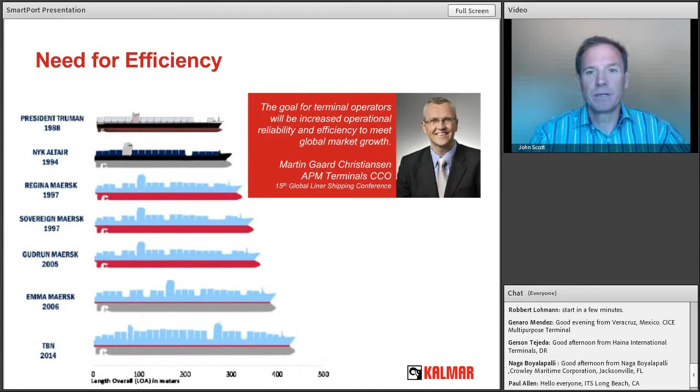And the expectation is that that vessel is turned quickly. There's no value to the owner while it sits there at the terminal. So this creates even greater strain on the terminal operator to put more equipment into service, to put more people in the terminal, and create safety issues, and it also decreases the efficiency of the operation.

The second thing to think about is the competitive landscape. If we look at the 20-year period leading up to 2010, there were 9 automated terminals that were deployed in that period. If we look now at the last 3 years, there are 12 automated terminals that are either deployed or in the process of deploying. In the Americas, you have Global Container Terminal in New Jersey, and right in the LA Basin, you have TraPac and LBCT. So the competitive landscape is changing, and it will be significantly more competitive.

And so for the terminals that are not fully automated, which is the bulk of those terminals, process automation is the means by which you can gain the reliability and the efficiency that you need in order to compete with the fully automated terminals.

When we talked at the last webinar, we talked about the difficulty of seeing process automation. You look out the window, you see cranes, you see equipment, you don't see process automation. And the same can be said of our own organization.

So I've put this slide together to emphasize where the Kalmar SmartPort solution fits into the big picture.

Most everyone's familiar with Navis and the terminal operating systems SPARCS and N4. Bromma is certainly very well known. Spreaders are deployed on most lifting equipment. And then within the automated equipment space, the automated stacking cranes, the AutoStrads, the auto shuttles, Kalmar's brand is well known.

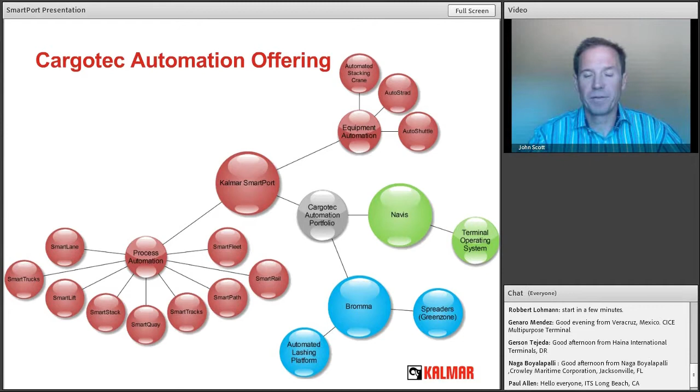So less well known has been the process automation, and over the last few years, Kalmar has pulled together offerings that were provided in-house, offerings that came from Navis, and offerings that came from a company called WhereNet. All of these offerings now are united under the Kalmar SmartPort brand, and we'll be talking about 5 of those 9 different modules as we go through the presentation today.

The technology comes not only from the internal Kalmar brands, Navis, Bromma, but also from third-party vendors that are part of our SmartPort Alliance. We've partnered with APS that provides the OCR technology we'll be talking about today, with Simeo that provides the tracking technology for GPS and LPR, and with Zebra that provides the RTLS tracking and RFID technology. Another vendor, Cross Control, is able to provide screens and integrated work instruction through SmartPort.

As we go through the presentation today, this is a really important point. If I look at the early projects I was involved with at APL, APMT, SSA, each of those terminal operators had to do all of their own research, put together a collection of vendors, put together the integration. It was a lot of work.

What the Kalmar SmartPort Alliance offers is the ability now for a new customer, like for example APMT Elizabeth in New Jersey, to have a single point of contact, Kalmar, to deploy the entire system we're going to talk about today. So single point of contact, known integration, and a project that is able to run much more quickly and smoothly than prior to the SmartPort Alliance.

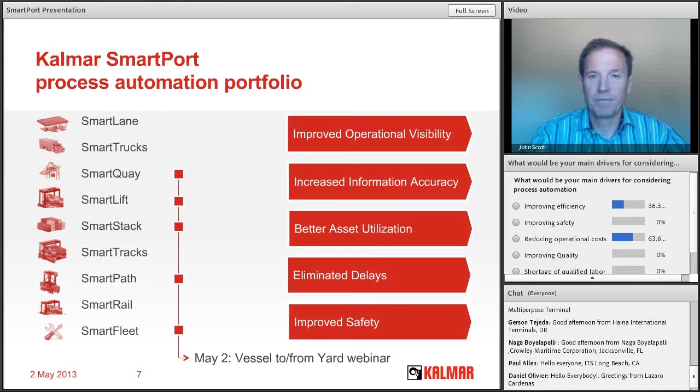So today's focus, we're going to look first at SmartQuay. We'll talk a little bit about SmartLift and SmartStack, and we'll spend some time with the SmartPath application and the SmartFleet application. These are 5 of the 9 modules that are part of the Kalmar SmartPort suite.

So first, what I'd like to do is talk a little bit about the process as it exists today, the manual process as it exists today, versus the process after the technology we'll talk about today has been deployed. Let's start at the vessel. At the vessel, for most terminals that are manual, two things need to happen.

First, the container being removed from the vessel needs to be identified, and that information needs to be confirmed into the terminal operating system. Second, the equipment that container is delivered to needs to receive a work instruction. Whether it's a terminal tractor or a strad, it needs an instruction on where the terminal operating system has determined is the most efficient place for that container to go in the terminal.

So, in a truly manual environment, that might be a list of containers printed out in advance, and radio instructions to the terminal tractor or the strad.

For terminals that have a little bit more sophistication in their terminal operating system, they may use a software module like Hatch Clerk, having a person manually type in the container ID and the terminal tractor ID, and then the terminal operating system can calculate and dispatch the work instruction to a screen in the truck. A little bit better than paper and radio, but still a process completely reliant upon the person entering the container ID and the terminal tractor ID. The speed at which they make that data entry is the speed at which your operation will proceed.

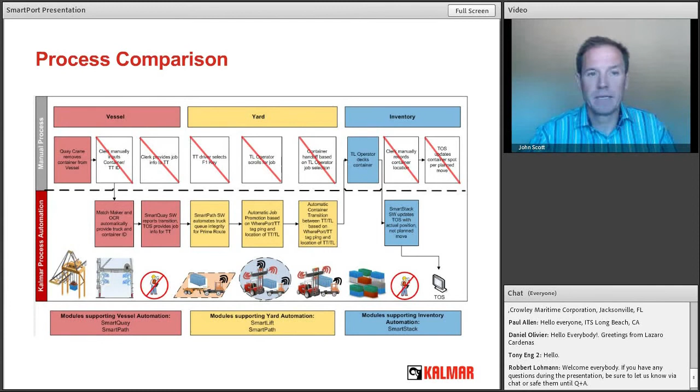Just to summarize, across the top, I suspect some of those squares with X's through them you'll recognize as processes that exist in your operation today. The technology we'll be talking about now will describe in greater detail how to eliminate those manual processes.

So let's talk about SmartQuay. The first step in SmartQuay is to identify the container, and for that we work with OCR, our partner APS. If you look at the sill beam in the picture just above where it says hard hat area, you'll see 3 cameras. Those cameras are used to take a picture of the container, and then an algorithm converts that picture into the corresponding numbers that identify the container.

That's the first step. The second step in SmartQuay is tracking the spreader. We're receiving information from the OCR vendor, from APS, and from the PLC on the crane that allows us to understand the trolley and hoist position of that spreader. We are also tracking the UTR, so we understand where that terminal tractor is, and we can use that information to automatically match the container to the terminal tractor.

Recently, we've also adopted a technology patented by APS, referred to as Matchmaker. If you look at the terminal tractor, you'll see a barcode on the roof. That information can be used to supplement SmartQuay, or even as a primary, to drive the handoff. The advantage is it also provides a backup, so that if the algorithm or handoff fails, there's still an image for an exception clerk to look at and remotely fix any exceptions to the process. So you have a fully automated process that also includes automated exception handling that can be done remotely.

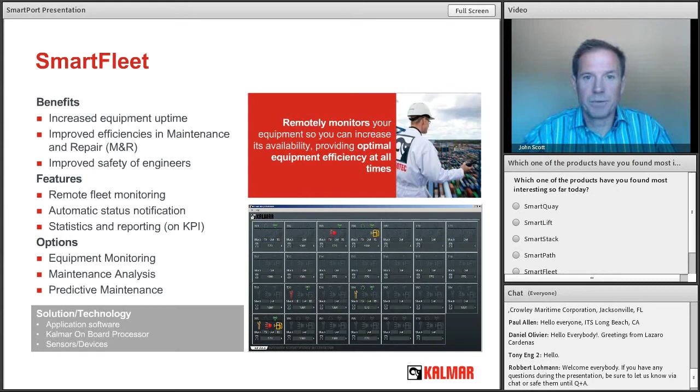You'll also see some yellow and red wrenches. Those denote preventative maintenance that needs to occur or is overdue. The system can look at engine hours and a number of different parameters in order to determine when maintenance should occur. Bottom line, it makes it a lot easier for your maintenance team to maintain the equipment, and it helps ensure that you don't have equipment damaged because it wasn't pulled from service when it should have been.

So I'm going to pass this over now to my colleague, and we will provide a demonstration of SmartMap, which is the visualization tool for what we've talked about here.

Thank you. As mentioned, I'm Barry Gollings, sales engineer for Cargotec Kalmar, and I will be stepping through just a brief overview of the SmartMap application.

What you see on the screen now is a very zoomed out view of a particular terminal in Long Beach, California. This is an RFID terminal where we have outfitted all of the internal CHE and street trucks with RFID.

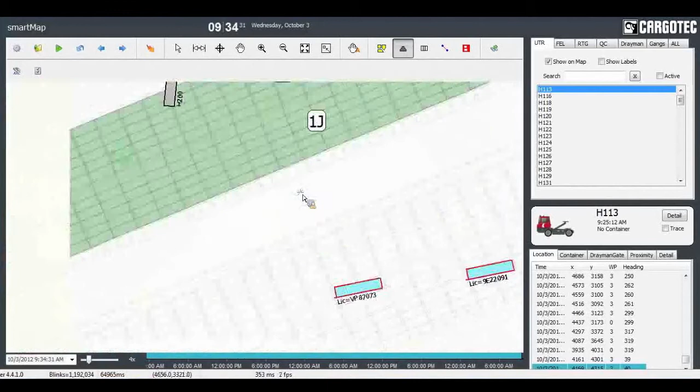From a map perspective, we have some of the basic user functionality. Say zoom, for example - I can zoom into a particular machine or part of the yard. I can pan and move around, and I can zoom back out.

Another interesting feature is the traffic pattern history of these assets as they move throughout the facility. In the upper right-hand corner, I can select the snail trail history, and what this will give is an idea of the traffic internal versus external.

So the bright magenta color here are the street trucks that are entering the facility and where they are going once on site. The black lines, the black trails, are the internal trucks. This can give folks an idea as to what the congestion issues are, where in the yard they're having traffic problems, things of that nature.

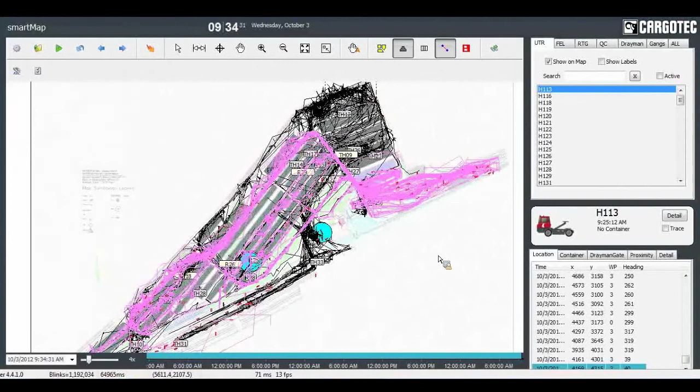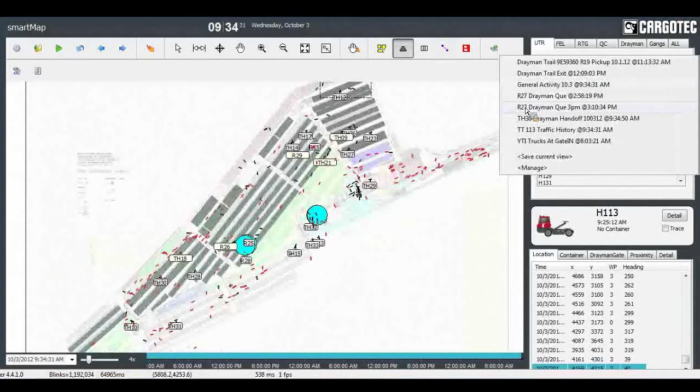I can also look at individual assets and their traffic patterns. So what I'll queue up is an actual terminal truck, and the H113 is what we've got selected here in the middle right-hand side of the screen.

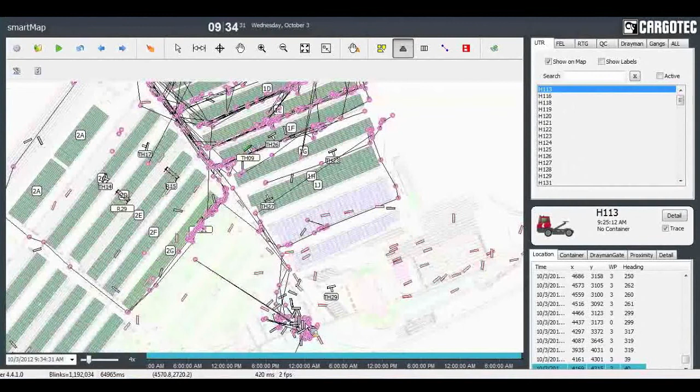If I hit the trace button, that'll give us an idea of what this truck did during this shift. Started down here what looks to be the parking lot, and then looks to be working vessel operations, as this up here at the top is the berth area.

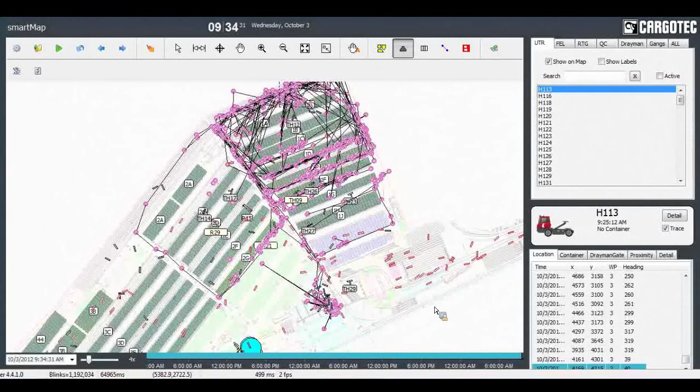We have alerts that we can set up that will automatically trigger if a particular truck goes in an area of the yard it's not supposed to. So in addition to seeing visually on the map where things are in real time, we can also automate the alerts if an asset goes into an area that the terminal does not want it to be in.

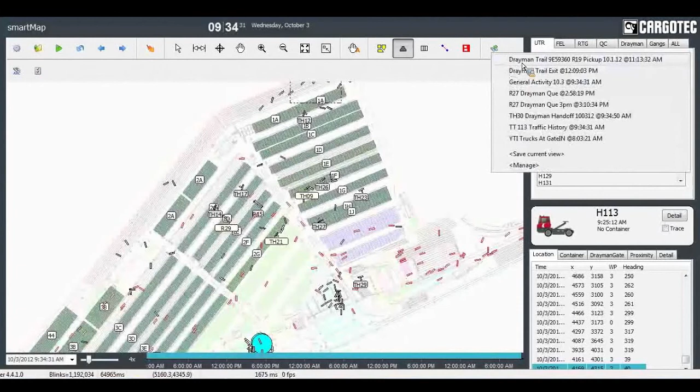So let's look at a particular street truck visit. I've selected a street truck, and again, I'm going to hit the trace feature. This is in replay mode, so I have the ability to press play and pause, and I can speed up in the lower left-hand corner here the manner in which it's played back. And this gives an idea of where this truck goes after it came through the in gates.

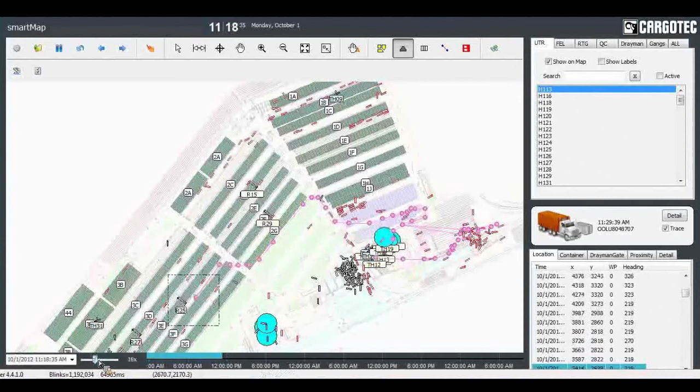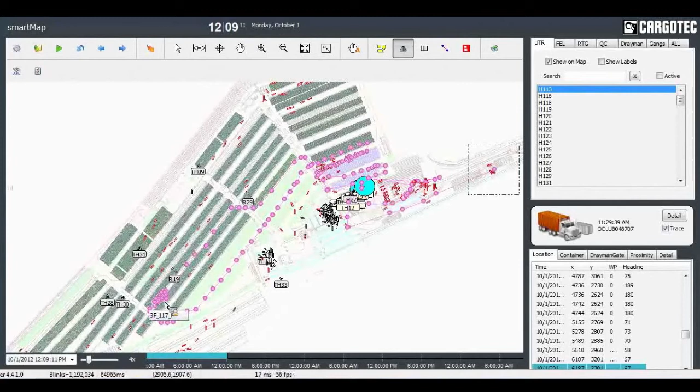Rather than watch the entire truck visit, I'll speed up to where the actual truck exited the facility. So the in gates are here. You can see where the truck came up through and down this row here to be serviced by one of the RTGs, and then exited the facility ultimately here at the out gates.

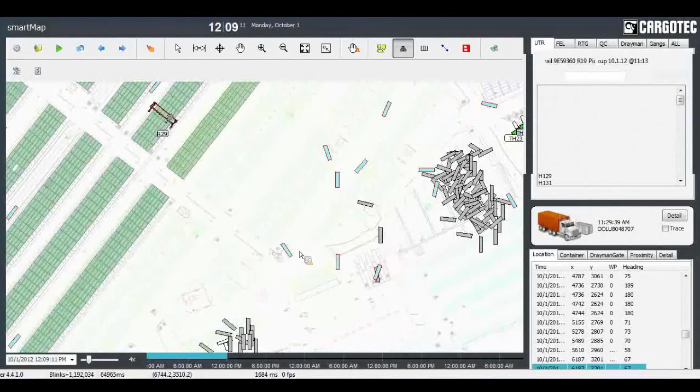So let's take a look at the RTG grid and what's happening there. I've got RTG 27 selected here. We'll zoom in a little bit, and when you zoom into a certain level, you'll automatically get the license plate IDs populated for the street trucks as they're in queue here, waiting to be serviced by the RTGs.

In the lower right-hand column or right-hand side of the screen, you'll see the transaction history for this particular machine. So you've got a container ID from where to where. In this example that's highlighted, there's a container ID, there's a from, which is a position in the stack - that's a row, bay, cell, tier - to the RTG, which means the RTG pulled the container from the stack. And in the next row, you see where the RTG actually handed the container off to the street truck.

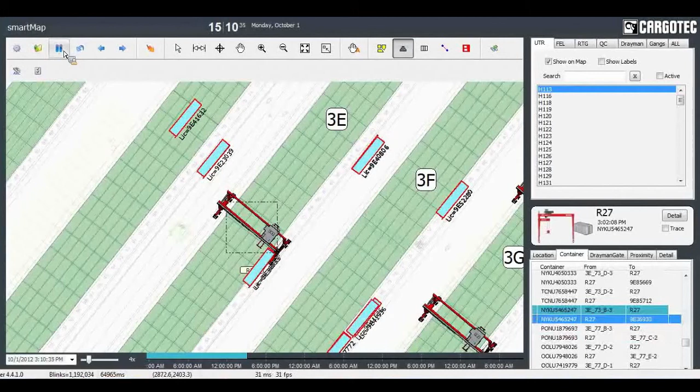That's essentially just a brief overview of the RFID site. What I can also show is our GPS site, and we'll show the top handler and terminal truck handoff.

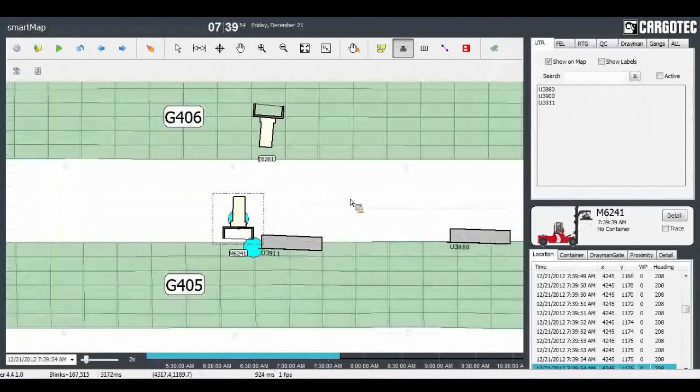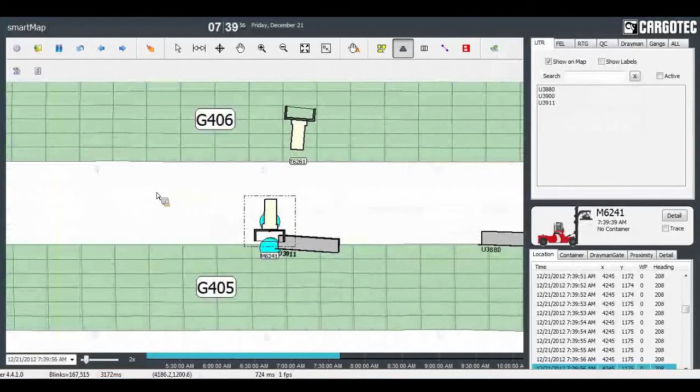So other than RFID, this site actually has DGPS on the top handlers and regular GPS on the terminal trucks. Again, this is in playback mode. You can see the truck pull into position. If I pause it right here, we can see that the terminal truck is in position.

The top handler's spreader is narrow. It's working a 20-foot container. And the top handler is positioned over the back of the truck, which would indicate it's pulling a rear 20.

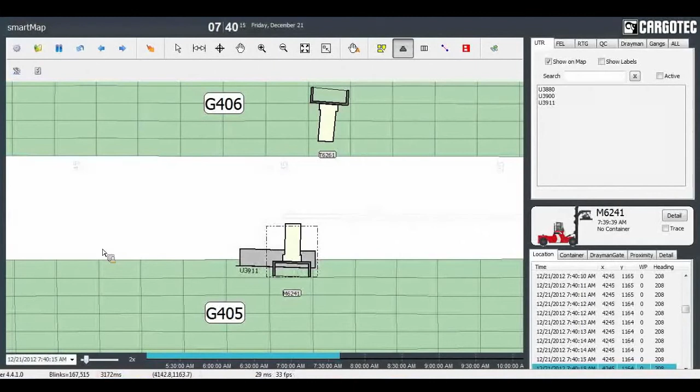As I hit play again, this spreader will go from clear to a solid color, which gives us the indication that the pull from truck actually occurred. It pulls the container, the terminal truck will drive off, and the top handler will continue into the stack to place the container.

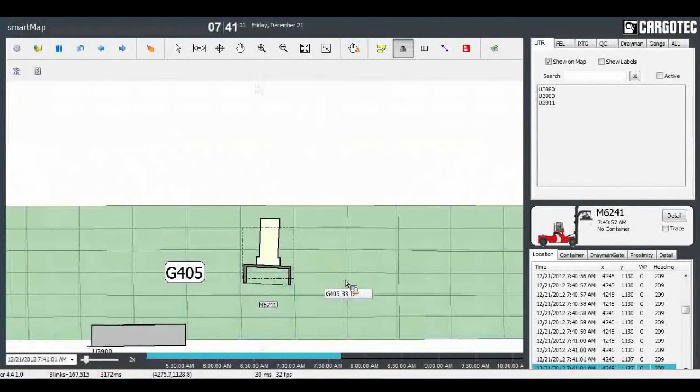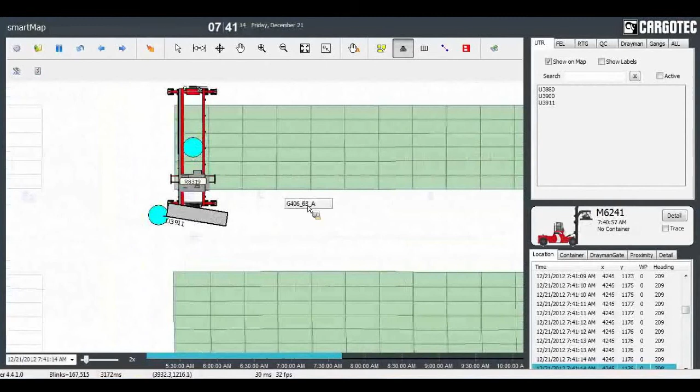Let's take a look at the same scenario, but the handoff will be between terminal truck and RTG. The truck will pull into position, and the exchange will take place between the terminal truck and the RTG. When that exchange has taken place, the terminal truck will drive off.

So that's essentially just a brief overview. Given the time constraints of the webinar series, that's all I'm allowed to show at this point. Certainly there is a lot more to show with the SmartMap application, and I would encourage you to reach out to your sales team if you're interested in seeing more detail, and perhaps even request detail for operations that suit your facility and how your facility operates. Thank you.

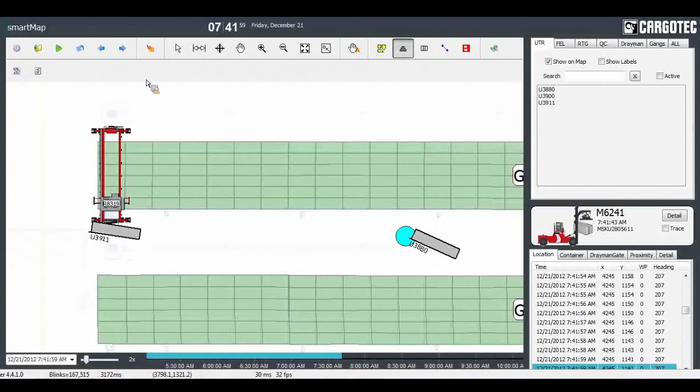Thanks, Barry. As Robbert mentioned, this video will be available next week for download and replay, as well as this entire seminar. So let's talk a little bit about where this technology is deployed, and I'll also answer - I saw there were a few questions in the chat session about the tracking technology that was used.

So for many of the terminals in the LA Long Beach area, the RTLS, the WhereTag technology, is used for tracking the bulk of the equipment. It's certainly the technology that's used for tracking the street trucks throughout.

That tracking occurs not only in the LA Basin, but also in Seattle and Oakland, and we'll be going live in New Jersey July 5th. And I was just in Colombia last week, and Cartagena also uses the same RTLS technology to track the street truck. Within the terminal, it really depends upon the site we're talking about, whether we're using RTLS, GPS, or even LPR to track the equipment.

So let me walk you through a few sites that are currently deploying, and then we'll also take a more careful look at LA Long Beach and the technologies that are deployed there.

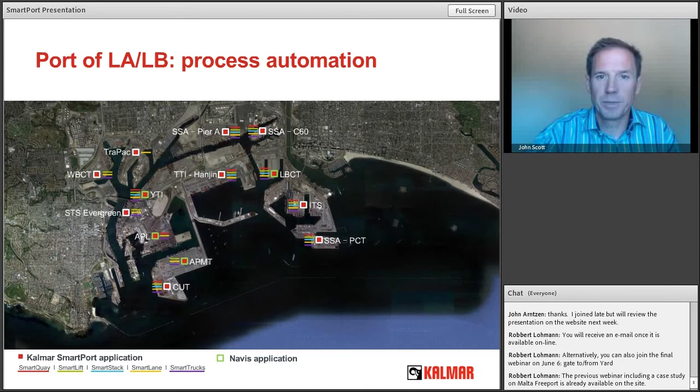Let's shift from technology to talk about the people. The technology we've discussed works with any terminal operating system. In LA Long Beach, 4 of the terminals use either SPARCS or N4 software; the other 9 don't—they use other terminal operating systems. So the system is able to work with any terminal operating system.

It's also able to work with any equipment, whether it's Kalmar, Fantuzzi, or pick a name—we've deployed on many types of equipment. The experience our people have gained through these deployments over the last 10 years is very important. It's what allows us to work with any terminal operating system or any piece of equipment, and it's a very important component of the solution.

You also see this experience within our support organization. Some individuals in our support team, Robert, Constantine, Kenneth, originally came from suppliers of this technology and have been involved in a number of these deployments. They've been to training with Simeo and with APS, and are able to provide a first level of support for the total solution.

So the terminal operator isn't challenged trying to figure out if a problem is an OCR problem, an RFID problem, a GPS problem, an interface problem—it's a long list. This team does a fantastic job providing support, identifying the problem, and has the ability to remote into the site and fix it.